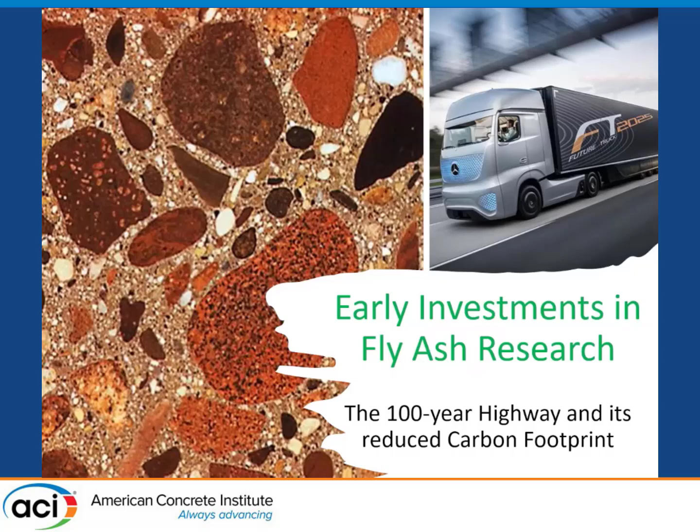But, you know, it's really been an honor. Randy worked with Ramon when he first got out of Cornell and came to UT with Breen, and by the time I came there, I had Jan Olick, who's here, and Luis Archuleta, in which I sat there and just shoveled aggregate for them for basically a year to learn everything. And then after that, spent the next time of my life with Ramon.

And so he became a fantastic mentor to me, but also a colleague and a friend of almost 40 years. And it was really sad to see him go. But when we look at this kind of impact that he had on so many of us, it was that he understood, and throughout my talk I'll talk a little bit more about some of that impact.

But one of the things you have to understand, when he came to Texas, he didn't know much about fly ash. He came from New York and Cornell. They didn't use fly ash. It was not permitted to be used in New York, Pennsylvania, any place in the Northeast. So it was not a thing.

But he knew opportunities. And you see that in his consulting, you see this in his education. He learned throughout his lifetime. And that's a great lesson for all of us. He learned about fly ash when he came to Texas because of the Resource Conservation and Recovery Act. In 1976, the Congress passed this thing. And it sat around for 10 years. It didn't do anything.

Finally, in 1984, it realized, well, it's got to be fully enacted by 86, within 10 years of the enactment of the original law. And nobody had done anything about it, and the EPA decided in 83 and 84 that fly ash would be the first product, the first giant-sized material that must be recycled by mandate. And of course, no one was ready for this.

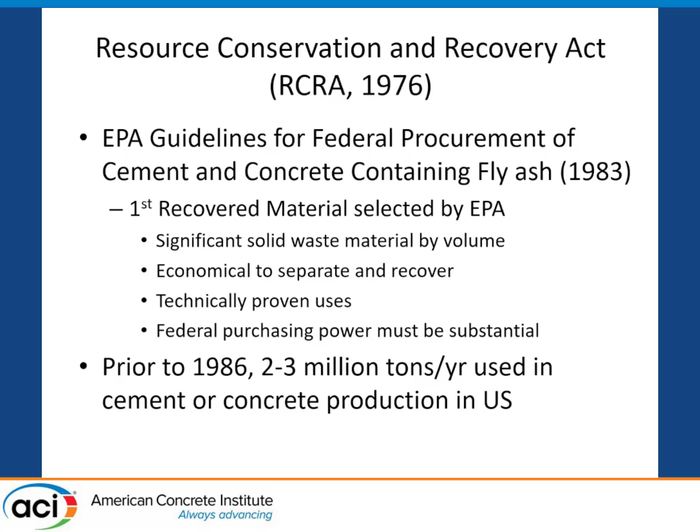And so as we went through this, the nation was using about 2 to 3 million tons of fly ash, mostly in foundation work and low hydration work. But he saw this and convinced them, and in the next 5 to 10 years, he went through a whole raft of graduate students and about $1 million in funding from TxDOT to change the way we see fly ash, that it's not a waste material, that it is a technical addition to concrete that makes it better in almost every way. And so he spent this time to do this.

Before this, the EPA just had anecdotal information. They had no technical data, but they made a mandate, and it said any state that doesn't allow it will not be granted funds from the federal government after January 28th, 1986. And so everyone adopted the federal standard, which was based on nothing other than a bunch of old studies and an NCHRP report which brought all this stuff together and said, well, 20%. Everyone has to use 20%. And nobody knew what to do with that exactly.

And Texas actually lost its funding for about 3 weeks because they were going to allow 35% in certain circumstances, and it wasn't exactly the same as the federal standard. So FHWA had to evaluate the Texas spec to see if it should be used.

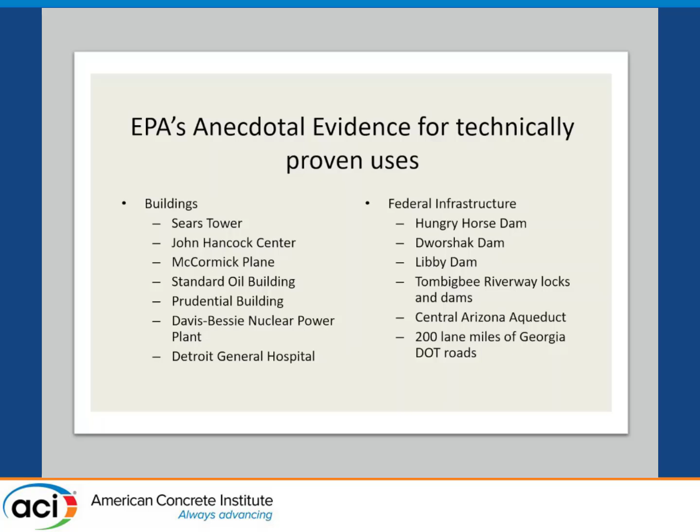But when we look at this kind of stuff, we see that there was this money. Everything was driven by money. And it turned out to be a fight between the EPA and the Federal Highway Administration. And the EPA won. The Federal Highway Administrator at the time fought this.

He said, nobody's ready for it, nobody's going to do this, nobody should do this, it's not good for highways, and said, put it in pavements and leave it alone. And he ended up having to go to a federal court to impose the EPA mandate. And the FHWA lost against the two government agencies fighting each other.

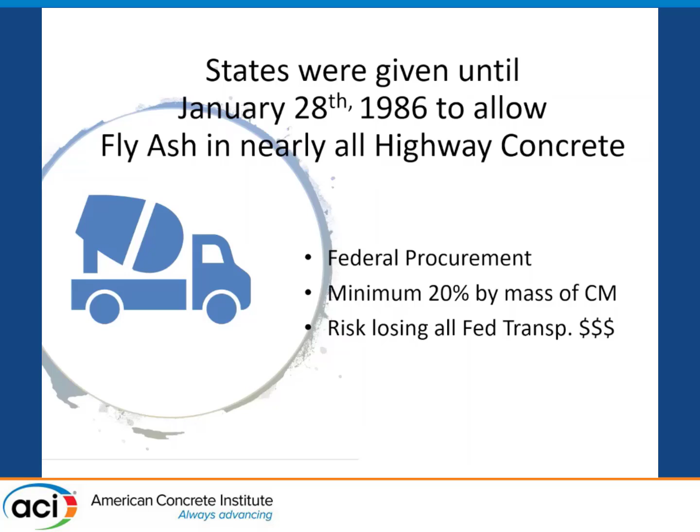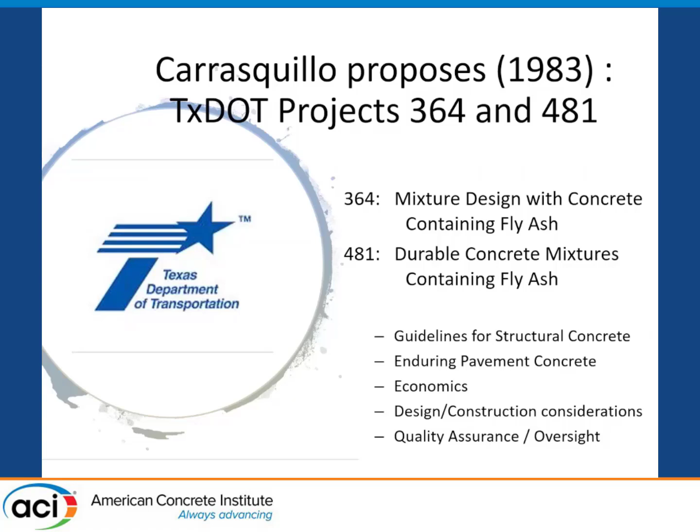But these were to create guidelines which create great opportunities and to show that it is technically smart to use it. When I came to Texas in 1984, they were getting paid $40 a ton to take fly ash away from the utilities. Okay, the utility had to bury it, and it cost $40 a ton. So if you were willing to take it, they'd give you the $40 and say, take it. And now it costs more than the cost of cement.

But when we look at this, we see that these results led to greater investments. And it wasn't just at UT. We saw people at Purdue, University of Wisconsin at Milwaukee. We had people in North Dakota. We had people across the country, universities, looking at different aspects and providing some collaboration so that the fly ash industry and the admixture industry all had to come together, eventually the cement industry coming on board and saying, this is the new reality.

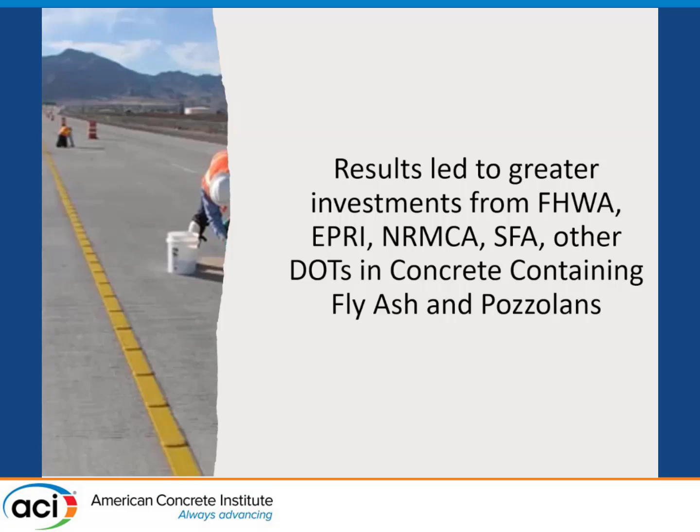And I think you see the parallel today when people are trying to make green cements. This same kind of reality now exists in a new paradigm. But Ramon was ahead of the game here, and he wasn't afraid to learn something new, which again is one of the big lessons here. And I think the thing we found out was that chemistry was important. It wasn't just, well, let's just try it and see how it works out.

No, we analyzed every bit of fly ash. We studied the glass particles. We studied every plant. There were 37 plants in my research. Every one of them was studied with SEM, with X-ray diffraction, with everything before we went and used it. And I had more than 10,000 samples going at any one time, and we were monitoring every sample for 3 years. It was exhausting. But we found what worked and what didn't work, and we could connect it to the chemistry.

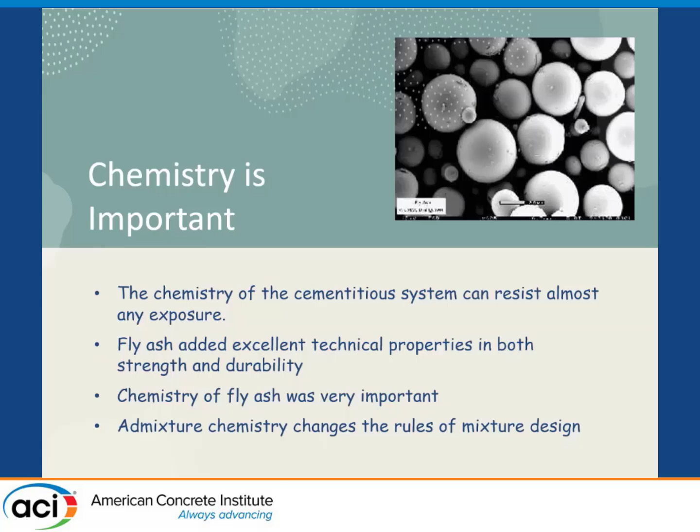And then other people could look at that chemistry and say, can we alter the chemistry? Can we collect ash differently? Can we classify it differently? How do we get a better product? So we looked at these changes, and then the growth of the specifications. ACI recognized this. Back in those days, we had ACI 226. It covered fly ash, slag, silica fume, natural pozzolans, everything.

And then it splits because this has become a giant industry, and it had a lot more technical data available. So it splits into three different committees: 232, 233, and 234. So 234 was silica fume, 233 was slags. And now, in the new paradigm, 232 is split into 232 and 240, where 240 is natural pozzolans and processed pozzolans.

And so you see, hardly anybody wanted to even be on 226 back in the day. Nick probably remembers. It was a small committee. It was chaired by Bud here. Bud didn't want to do the chair anymore, and neither did anybody else. Who cares about fly ash? So it made me the chair of an ACI committee, and I was 31 years old or something.

But it grew, and the specs grew, and people became more understanding of it, and now people wanted it. States start putting it into their specifications and say, you must use it, because it's the thing that reduces permeability and conductivity. It creates an environment by which salt and chlorides won't enter as quickly. It helps you with the diffusion problem of salts.

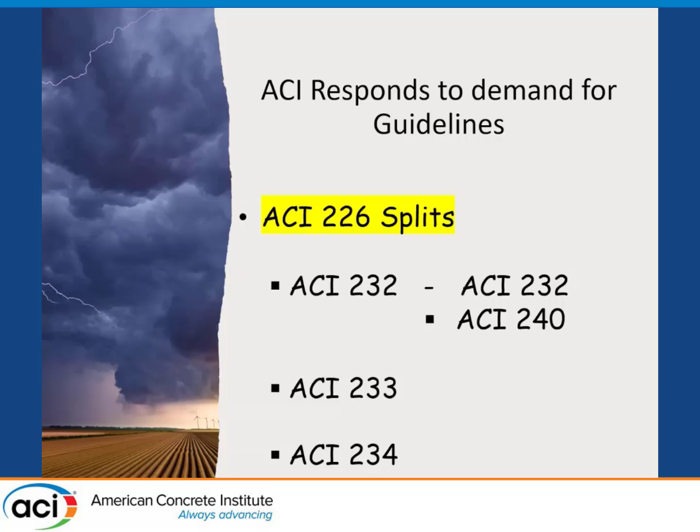And so as we look at some of these kinds of things, this created the environment for which we can talk about more resilient infrastructure. So this has been the key to extending much of the life of our infrastructure. Later in my career, I ended up doing the 100-year highway in Pennsylvania. It's I-99.

25 bridges were built for the same cost as they would have done otherwise, but paying attention to quality control, slags, fly ash, silica fume, the amount of this collaboration that Carlos talked about. The designer and the contractor and the ready-mix producer and project management and the owner talk about what are we going to make the bridges out of on a weekly basis until they actually get built. And everybody was on board, and they found out it ended up costing less. So they allowed them to spend more money on quality control, which even made them better.

And those things now, it's 30 years later, basically no maintenance has been required since they've been built. And so I think we will see them. I won't get to see them, but someday they'll get to 100 years.

We looked at sulfate resistance, salt resistance, ASR, impermeability. All of these things, each one required a different type of design. You're not going to get low heat and all of these at the same time. So you had to learn how to optimize which ones. And Ramon taught us those things. He said, don't try to be all things to everything. It doesn't have to make a super cement. Figure out what conditions these people have and design it for that.

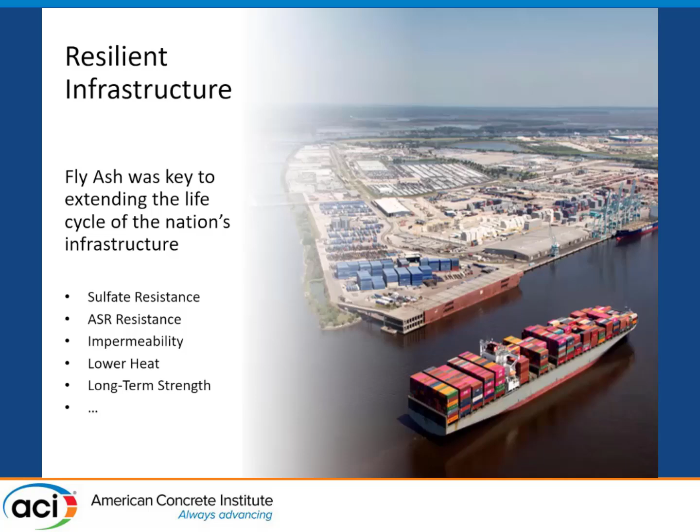So this leads you to this idea that we shouldn't confuse the complexities of what could be versus what is durable and long-lasting, and all of these kinds of things, they don't have to be expensive. Well-trained crews and quality control matter, and Ramon understood that. When he was involved in a job, he was up to his boots in it too sometimes.

As Randy showed, I can't even show you my gear from the Ferguson laboratory because it was a set of overalls that stood by themselves after 4 years. I didn't even have to put them in a locker. They were so full of cement paste that it eventually had hardened. They were just kind of an armored suit. And I don't even know what happened to those anymore.

But when we built these things, we ended up with these extraordinary possibilities. And this is one of those bridges in the 100-year highway. I mean, these are giant bridges we built. These aren't small overpasses on an interstate. These are long bridges, 25 of them, and every one of them was designed with a different concept to make them last 100 years. And they're all doing great.

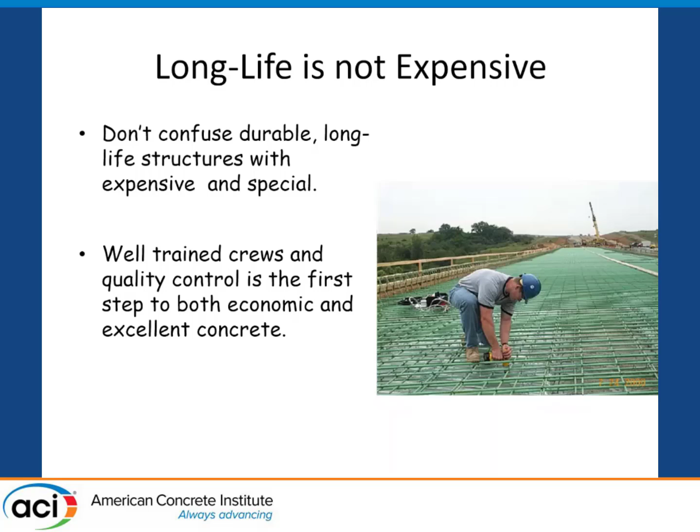They didn't want us to build any concrete bridges that would fall apart. You can understand that. I think they have a whole state of those. So today we look at 12 to 13 million tons of fly ash going directly into the concrete industry, into the reinforced concrete industry.

It could be even higher, but we see the reduction in coal production now for greenhouse gas emissions and so forth. This is going to be harder and harder to do. You're going to have to find a new way to do it. And it's one thing, we put ourselves out of business. But the fact is now we're mining fly ash that we didn't use before 1986.

We're digging it up and processing it and trying to use it again, because all of that stuff was there for 40 years before then. And so I don't know how we'll do with that, but we'll see. It's happening already, and it's productive. When we look at the amount of CO2, which we didn't think back in those days was even important. Nobody cared about how much CO2 cement made, how much it took to produce or whatever.

But if you just look back at the amount of fly ash that has been put in concrete in Texas, and TxDOT gave me these numbers a few years ago, that $1 million of research they invested has saved more than 1 billion tons of CO2 just in the state of Texas. 1 billion tons of CO2. That wasn't its intent. But the reality was finding a great use for it turned out to be a solution to helping with the climate issues.

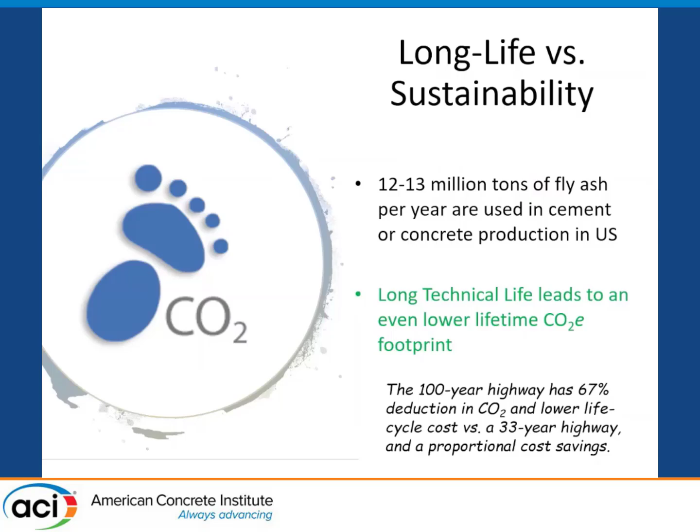People often forget, let's see, oh yeah, here we go. If you look up here, concrete is one of the least embodied energy materials compared to aluminum or copper or steel or glass. We use more of it per ton, but it's actually a very environmentally friendly material because most of it is sand and gravel, right? And these are not high-intensity materials. So as we look forward to the next generation of maybe greener materials, you shouldn't forget that concrete is one of those materials, and it's one of the many things we learned from Ramon.

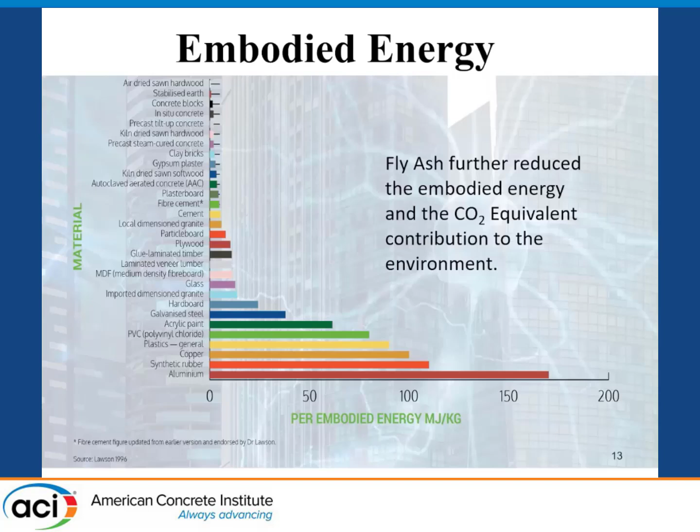There's a few other things I learned from Ramon: that concrete is both a science and an art. I think Carlos talked about this too. It is a science. It is not a mystery. The concrete will tell you what it's doing. I remember both Ramon and Joe Yura used to say this. If you stare at a structure, it'll tell you what it wants to do. It'll tell you how its loads are going to be distributed. It'll tell you how it wants to be treated over time.

You will be able to see it even after a few years. You'll notice whether it needs assistance or you did it right. You don't have to wait 50 years to figure that out. It'll happen soon. And so as you get that instinct, and we try to teach our own students that, to understand that loading follows stiffness, stresses and so forth, the same thing is true of these materials. As we pay attention to them, they talk to us, and we understand how to combine the science and art of concrete.

That we need to keep learning. We need to not confine ourselves to whatever we did our PhD in, as if that's the only thing we're going to do the rest of our lives. I can't think of very many successful PhDs who continue to do the same thing they did in their studies. They find other things to learn. They're lifelong learners. Look ahead and keep moving.

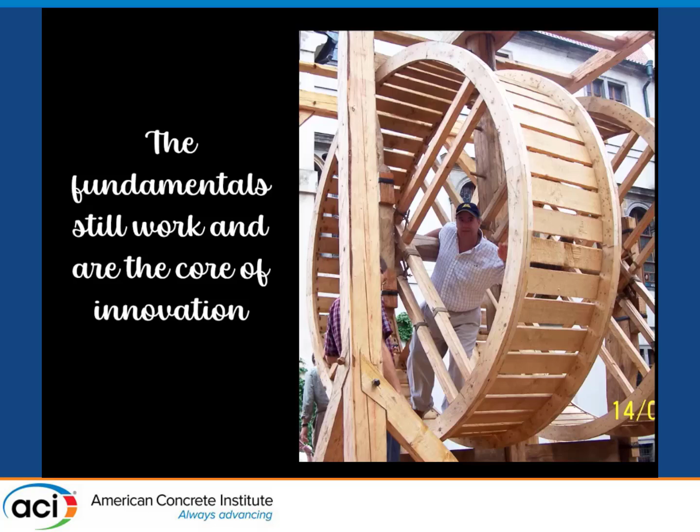There are other impacts of this long-term life, and fly ash reduced the interruption in commercial enterprises. When you don't have to rebuild something, when you don't have to shut it down, when it always operates every day, when you go there in that silo, whether it's a fly ash silo, a wheat silo, or a cement silo, it works every single day. That is gold for companies from a commercial standpoint.

And so make sure that you design and build things that don't have to go down because they need a lot of maintenance. Same thing, we look at the Bureau of Reclamation, those dams that we build, everything from the Hoover Dam to the Hungry Horse Dam. These dams operate for 70 years or 100 years, and we're still operating them. And we didn't have to tear them down.

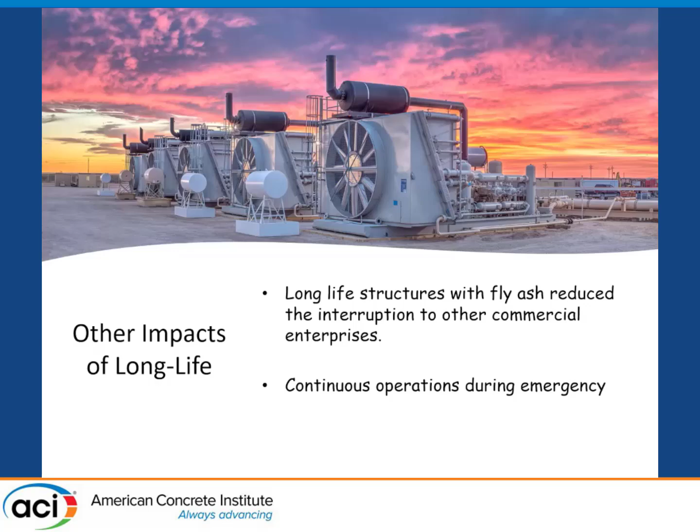I should have said on the last one, continuous operation when there's an emergency. When do you need a fire station? When there's an emergency. When you have a hurricane or a tornado or an earthquake, you need all of these kinds of things to function. And with concrete, we can design structures like that. And that's something to remember of the lessons we get.

We're now moving maybe more toward endurance-based design. We see integrated structural systems. We look at advanced materials. But we also have to look at the toughness of structures and toughness of materials. And these are things that, again, reflect the endurance of what we design every day. We don't make disposable stuff. This is one of the fundamental things I think we see at ACI, and most of us are committed to this idea of quality concrete, of innovation in concrete. But we're not designing something to fall apart next week.

Right now, I know that we've got some colleagues looking at the concrete platform SpaceX launches off of. It basically destroys the slab every single time. And you've got to rebuild it or fix it. So why don't we build a slab somehow that can take this enormous heat? And that's being done right now. It's not going to be concrete. It's going to be out of a different material. It's a crazy material, but it'll be something else. But the foundations will be concrete, probably.

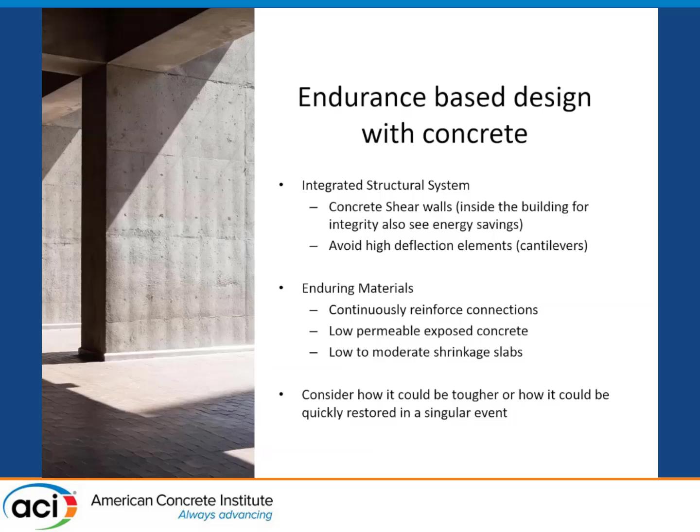So, why not use it to do the kinds of things? And now we see people putting shear walls in buildings that have the same elements. An interior shear wall that's heated and cooled with geothermal now creates steadying temperature inside of a building, and so it reduces your heating and cooling bills. But it's because of the concrete mass. So we're using the concrete not for structure or for durability, we're using it for mass.

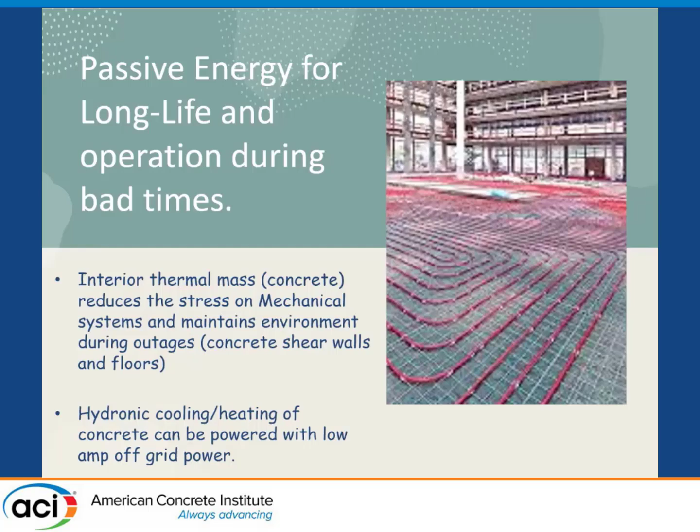And the final lesson we learn is no matter how long it's been, reach out. I learned this from Ramon the hard way, I think. Ramon and I had gone our separate ways. I had been a professor for 10 years. I was living in Pennsylvania, at Penn State at the time. And all of a sudden I get a call, it's like on a Wednesday. And it's Ramon on the phone. Ramon never called me back in those days. I was his long-lost student.

He calls me and says, I heard you got married and you have kids. I said, I do, and I have kids, yeah. He says, well, why don't I take you and your wife out to dinner? I said, well, we live in State College, in the middle of nowhere in Pennsylvania, and there's no airport here. At the time, there was no airport in State College. And he goes, okay, how about Friday night? I said, fine, I'll see you Friday night. So Friday afternoon, about 4 o'clock, he shows up at my house in State College, Pennsylvania. Flew into Harrisburg and took us to dinner.

My wife had never met Ramon, and I tried to give her a little warning that this is a different kind of person in life, okay? He's a hunter, and especially in the middle of Pennsylvania, okay? That he's more robust than most people you have ever met, and his humor won't be the same as you're used to. And he didn't let us down. He was 100% Ramon for dinner.